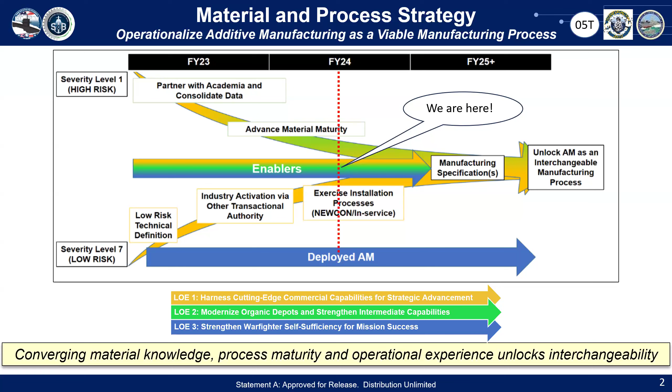Beyond the raw material properties, you have application and performance requirements. Just because you 3D print something doesn't mean you can skip functional testing, doesn't mean that you can disregard your environmental requirements or pressure retaining or anything like that. And then finally, we have to understand what our vendor base can do and what machines are available.

And once we have all of those combinations, we allow that to create a selection of what we call an MPC, material process combination. For example, 316L laser powder bed fusion was a material process combination. Copper nickel directed energy deposition using wire arc is an MPC. They're going to be different. The requirements and the output and the artistry is going to be different from each one.

Once you have an MPC selected, you then need to incorporate your business and legal considerations. Can we reverse engineer the part? We have a policy in place, it is government approved, that allows us to reverse engineer components when it's done by the government and there is an imminent need that cannot be met by industry. As the government, we have the right to make sure that our vessels are capable of defending our country.

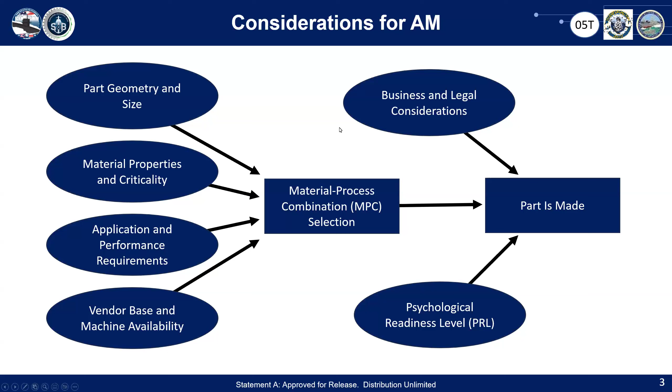And that's where the psychological readiness level comes into it. All of those things flow together to ideally making a part. Now, outside the bounds of those MPCs, there are a lot of processes that we're interested in.

And what we have here is a pretty picture that shows all of the 7 core AM fields for the, I think it's the ISO definition, as well as some of those sub areas. And areas that have a blue dot next to them are areas that Navy NAVSEA either has an existing process standard or is working on establishing a standard. And the major ones are laser and electron beam powder bed fusion.

We are looking at developing a process qualification for metal binder jetting. We have investments in polymer material extrusion. We're very close to having a technical publication for polymer and composite material extrusion. We have an existing tech. We're also looking at friction stir and material extrusion. We have a technology publication for wire arc directed energy deposition, and we're also expanding that to powder laser.

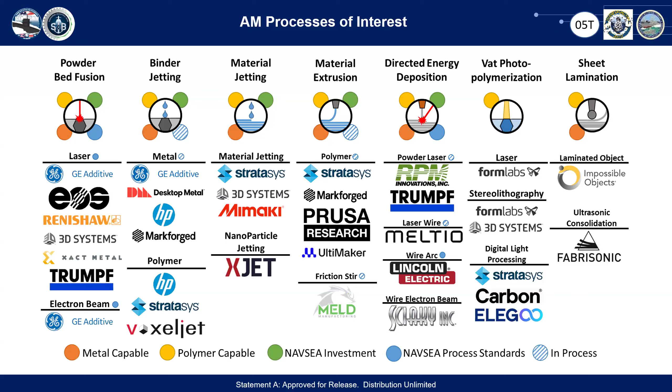First one is MIL 100S. This is a welding wire that is a legacy replacement for cast HY80, which is a high strength structural steel used in submarine hulls and other major components. We have nickel aluminum bronze, which is extensively used in impellers and propellers and fluid handling systems.

We have copper nickel. That's a 70-30 blend of copper and nickel. That is extremely prolific through many of our systems. A lot of our piping structures use it. Anywhere that we're concerned about corrosion, it exists. There's also a 316L stainless steel. This is actually not just 316L, but kind of covers the entire family of what's called CRES, corrosion resistant austenitic steels, I think it is.

That is going to be steels which we know will be in a corrosive environment, but may not necessarily be subjected to the level of environmental hazards that, say, a copper nickel or nickel aluminum bronze will face. Inconel 625, alloy 625, is used extensively in high temperature systems, gas turbines. And then titanium is of interest. It's used a lot in our more corrosive piping systems, for example, a lot of our fire suppression equipment.

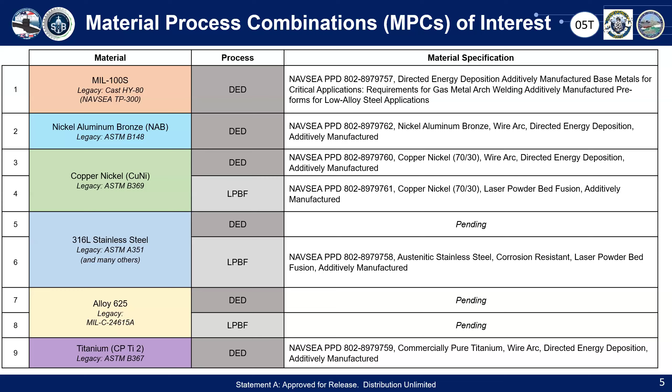It is the stepping stone that we are using to establish what's called a material maturation team, MMT. And those efforts are there to establish exactly what that particular MPC is going to do to a statistically rigorous level of understanding. The long-term goal being that every single one of these MPCs is going to have a military spec material specification. I think it's going to be a MIL DTL, but the exotic requirements of the MIL standard realm are something I'm still exploring. But it will be a standard, it will be a MIL spec, and it will be something that the Navy spearheads to be used across the entire industrial base.

To support those particular MPCs, the Navy has been extremely prolific in making technical documentation. Back in 2018, we created the NAVSEA guidance on the use of additive manufacturing. This was our line in the sand for how AM is approved. What does that decision tree look like? Who has to approve it? And what materials can be used aboard ship?

Obviously, 2018 is forever ago when it comes to a technology advancing as rapidly as additive manufacturing. And we are in the process of revising this guidance to take advantage of a lot of the efforts and understanding that have matured since then. An example of that maturation is the guidance on identification and installation of low risk additively manufactured components. This is what we call the low risk letter. This was issued as publicly releasable back in May of this year.

What this document does is it says this material, this particular application is of so low risk that you are allowed to use laser powder bed or directed energy deposition without approval from NAVSEA. Components like deck drain covers, louvers, a lot of hand wheels, components which we want to get printed, we want to get fielded, and we know it's okay if they fail. We don't want them to fail, and we are trusting our design agents to execute due diligence, but we don't necessarily need to watch over those components to the level of specificity that, say, a SUBSAFE part would require.

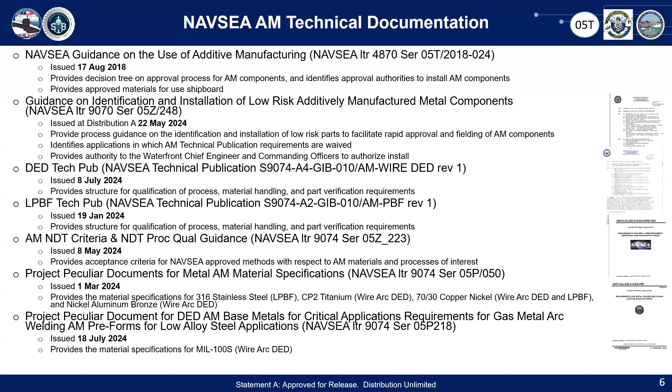We also have the material specs, those PPDs; this was released in two groups. The first one being a series of PPDs specific to 316L, copper, titanium, commercially pure titanium, 70-30 copper nickel, and then nickel aluminum bronze. And then we also did a second one specific to MIL-100S, because MIL-100S within the context of the Navy is its own beast. It requires very specific levels of control and maturity, and so it's a separate effort compared to the others.

In terms of where things are being produced, a lot of what we're doing right now is addressing point of need situations where the supply system has failed us. And that means situations where it's going to take us months to get a component and the boat has to leave in weeks. Components that the shipbuilder is excited to see. CANN or cannibalization lists, meaning that when one vessel comes in, the first thing they do is they immediately start stripping off parts that can then go to other vessels. They cannibalize the vessel that just came in so that other vessels can get out. Well, that creates a pretty nasty cycle. And so part of our goal is to utilize that list to establish what our high priority components are.

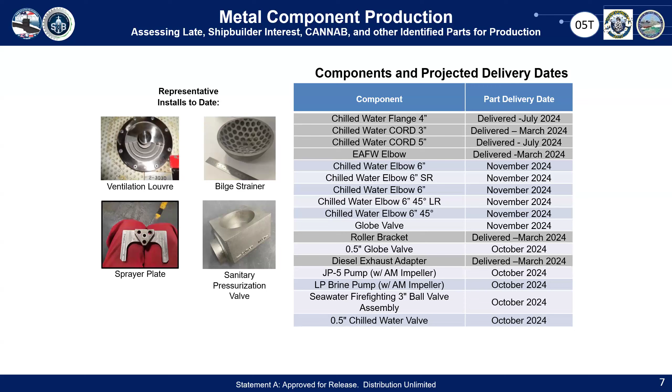And what we have here is a series of examples of installs. A lot of these are low risk. The ventilation louver went on a submarine. The bilge strainer is a component that normally gets corroded very quickly. The sprayer plate there was manufactured using shipboard AM, and I'll cover that in a bit. And then the sanitary pressurization valve was one of the first copper nickel components that was manufactured using LPBF. That is actually an example of something that wasn't low risk. It was just on the threshold, and we evaluated and accepted that.

These are some additional examples. We have drain strainers, release mechanisms, door hinges. The main thing here is that these are all components which individually don't necessarily seem like much, but what they represent is the fact that we are seeing metal components get out in the field, and that it's enabling us to say additive manufacturing is not as scary as you would think.

And in FY24, we have, for example, this proximity switch bracket, which was a pain in the butt to manufacture, and we were able to 3D print them very quickly. And on the right, you can see some of the really bigger parts. That manifold there is, I think, 4 feet long. That's made out of 316L, and I think it's a JP8 manifold, so it's going to have jet fuel running through it. And then on the other side, you can see this strainer component, which is also fairly sizable.

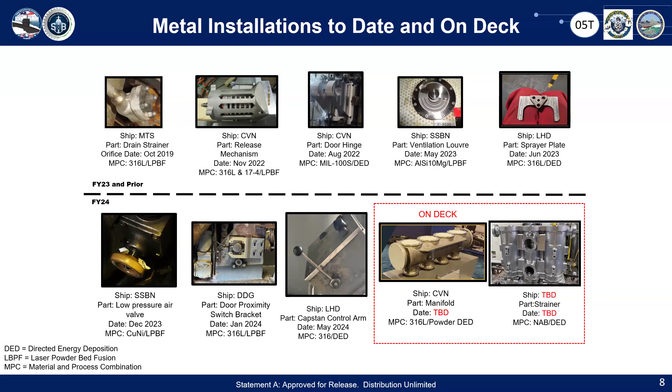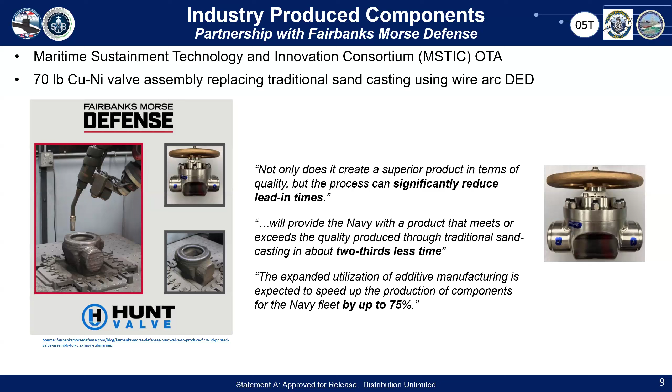We are working closely with industry. An example of this is our work with Fairbanks Morse Defense. This is all done through the Maritime Sustainment Technology and Innovation Consortium, the MSTIC OTA, Other Transactional Authority. In this case, it was a 70-pound copper nickel valve assembly that's replacing a traditional sand casting. They used a wire arc DED, which you can see on the left-hand side, and it's producing significant benefits: reduction in lead times, reduction in waste material, and the turnaround time is probably our biggest benefit here.

We are deploying additive manufacturing. This is something done directly underneath NAVSEA 05T. 05 is supporting both metal and polymer. You can see here this is a hybrid metal AM system. It is a Haas TM1 machining center with a Meltio laser wire DED system attached. It runs in 316L. And you can see examples of components that were manufactured down on the right.

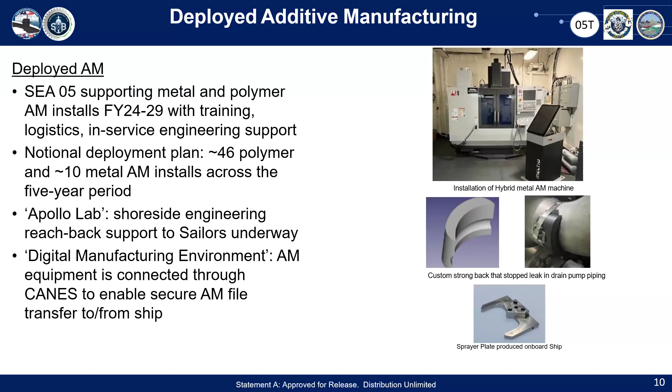There was a custom strongback that you tie to piping to help support it, and that prevented a leak. And then a sprayer plate down there, which was actually produced on the Wasp, or was it the Bataan? I think it was the Wasp. And this is the Bataan. This is an example of a fielded AM process used on ship to manufacture at the point of need.

So what happened was the Bataan had a deballasting compressor housing, and they found that a sprayer plate was somehow missing. It's not a terribly complex component. It's maybe 6 inches wide, but it allows oil to be sprayed inside the compressor, and it maintains reliability. Normally, you would spend, I think it was $250,000 to replace the entire system. But what the sailors on the Bataan did was they grabbed a sprayer plate off of a different compressor. They used a combination of calipers and CAD to make an initial model.

That model was then sent to the NAVSEA Apollo lab located in Carderock, where they refined the model and did a test run locally using their own Meltio system, and made sure that it could be manufactured using only the tooling that was available on ship. So for example, they had a drill bit that wasn't long enough to go through the entire length of the component, so they had to make sure they could drill it on both sides and that it could be manufactured using only what was on ship.

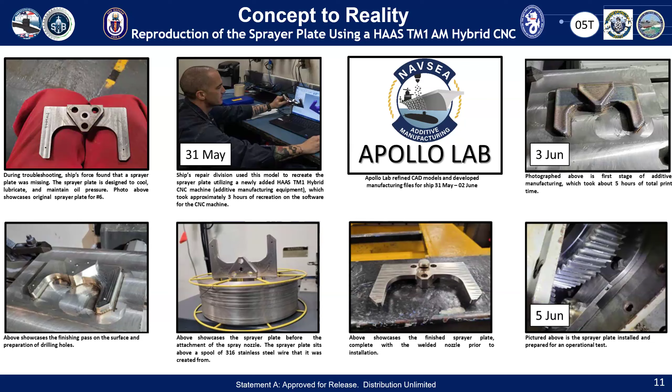They fabricated it, they machined it, they cut it off the plate, they did finish machining, and they installed it. You can see there that from model to installation was less than a week. And that is the kind of benefit that we're seeing additive manufacturing provide when fielded.

Another example, there was a shipboard optical landing system. It's a very large critical component. They had a shaft coupler between the motor and the pump system. This is a small piece of plastic which is designed to fail so that you don't break something expensive. Well, it failed and they didn't have a replacement. So the Apollo lab was able to model and demonstrate how to print a replacement. And 2 days later, it was installed and it worked fine.

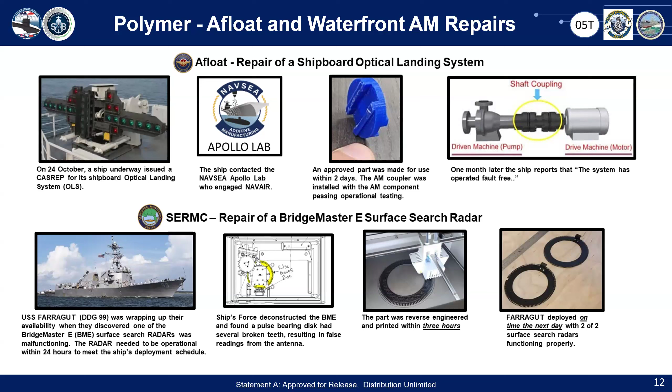Another example is a gearing housing, which was necessary on a ship on a surface search radar. What they found was that there were missing teeth on this component. They were able to reverse engineer and print the replacement in 3 hours, which is a good example of how a component which would not have been able to function to the level required was able to be manufactured and installed in a timeline that is previously unheard of.